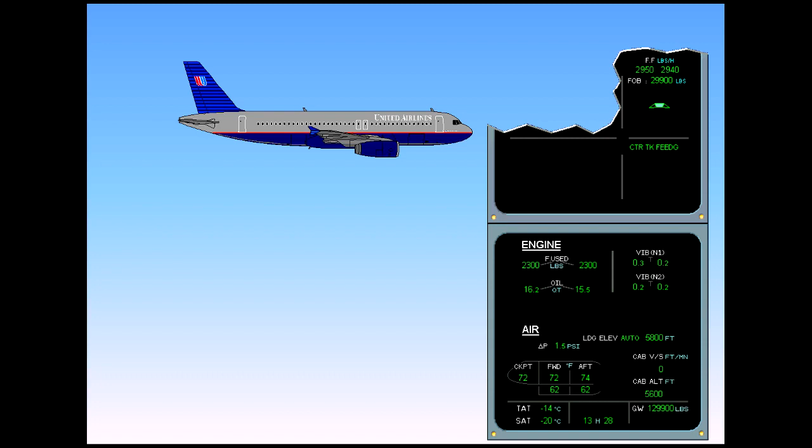This is a demonstration of a failure of the center tank pumps. You are in cruise with the aircraft operating normally. On the engine warning display, read the title of the failure. Notice that the ECAM fuel page is automatically displayed.

Notice the corresponding indications. On the ECAM page, low, boxed amber, means the pump is on but not producing adequate pressure. And on the fuel control panel, the fault light is illuminated amber on the center tank pump 1 push-button switch. Perform ECAM action. Switch on the fuel cross-feed.

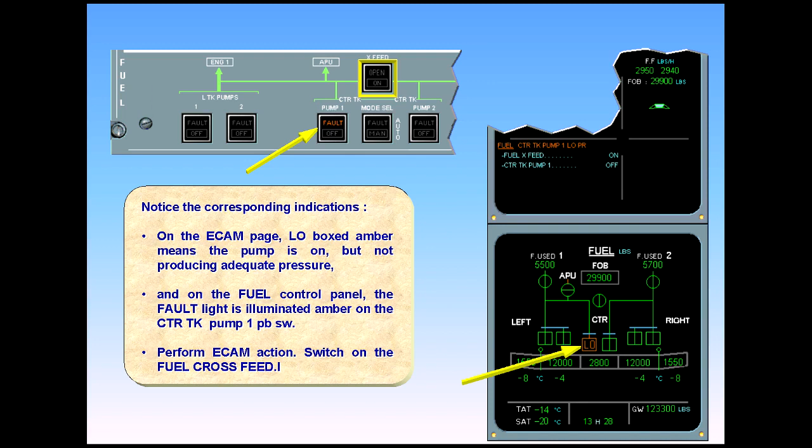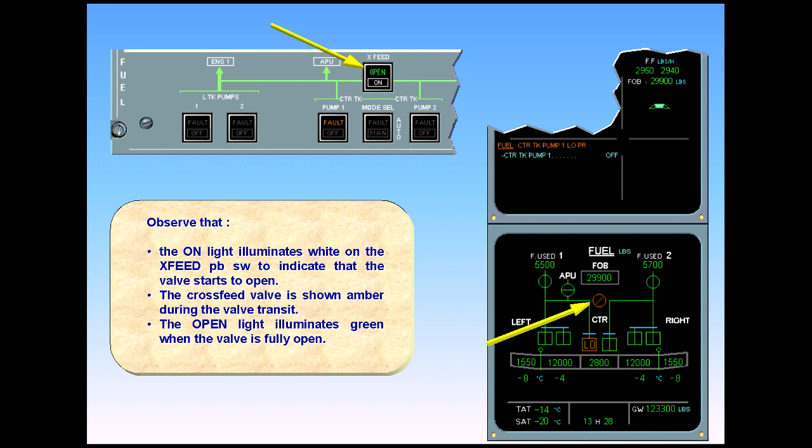Observe that the on light illuminates white on the cross-feed push-button switch to indicate that the valve starts to open. The cross-feed valve is shown amber during the valve transit. The open light illuminates green when the valve is fully open. On the ECAM page, the cross-feed valve is inline green. This allows both engines to be fed from the center tank using center tank pump 2.

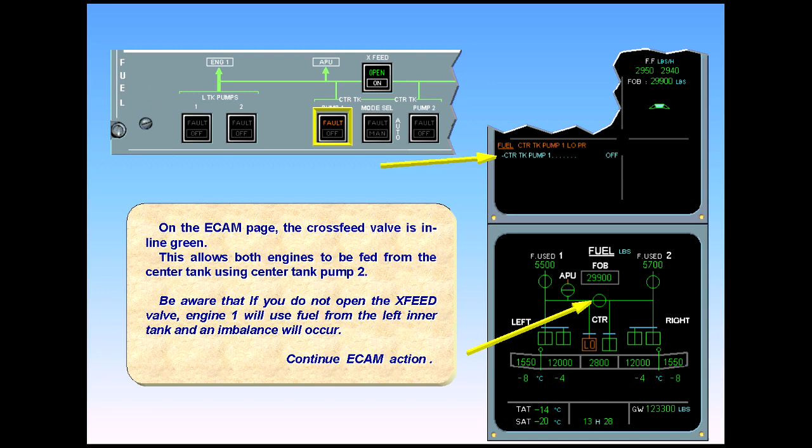Be aware that if you do not open the cross-feed valve, engine 1 will use fuel from the left inner tank and an imbalance will occur. Continue ECAM action. On the center tank pump 1 push-button switch, the amber fault light disappears and is replaced by the white off light, indicating that the pump has been turned off. On the ECAM fuel page, the low indication disappears and is replaced by an amber cross line, meaning that center tank pump 1 has been manually switched off.

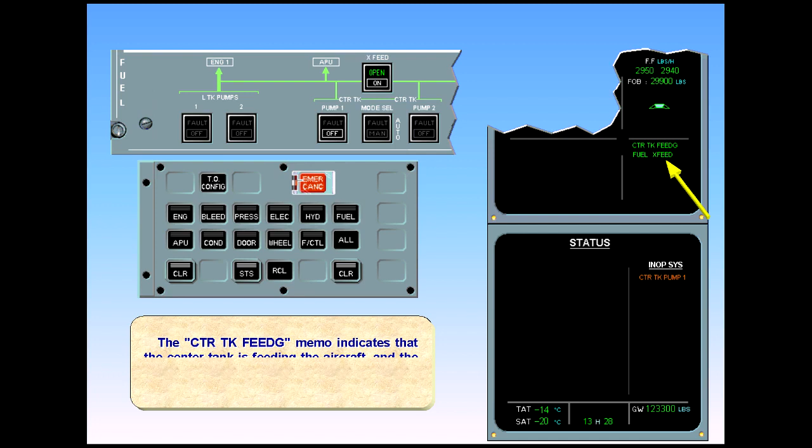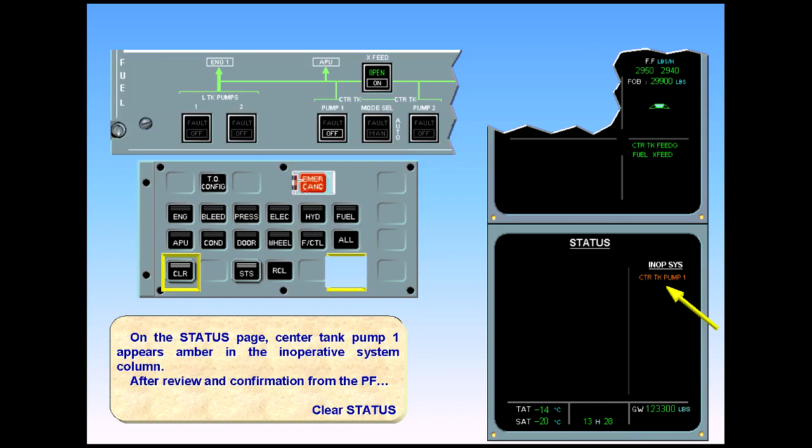The abnormal procedure is complete. The fuel system is analyzed. After review and confirmation from the pilot flying, clear fuel. The center tank feeding memo indicates that the center tank is feeding the aircraft, and the fuel cross-feed memo indicates that the cross-feed valve is open. On the status page, center tank pump 1 appears amber in the inoperative system column. After review and confirmation from the pilot flying, clear status. ECAM complete. Screens normal.

You are continuing in cruise. Remember that center tank pump 1 has failed. Let's see what happens if center tank pump 2 also fails. On the engine warning display, the amber message, center tank pumps low pressure, means that both center tank pumps have failed. You have the same indications as you had for center tank pump 1 failure. Low boxed amber on the ECAM page, and the amber fault light on the fuel control panel. Perform ECAM action.

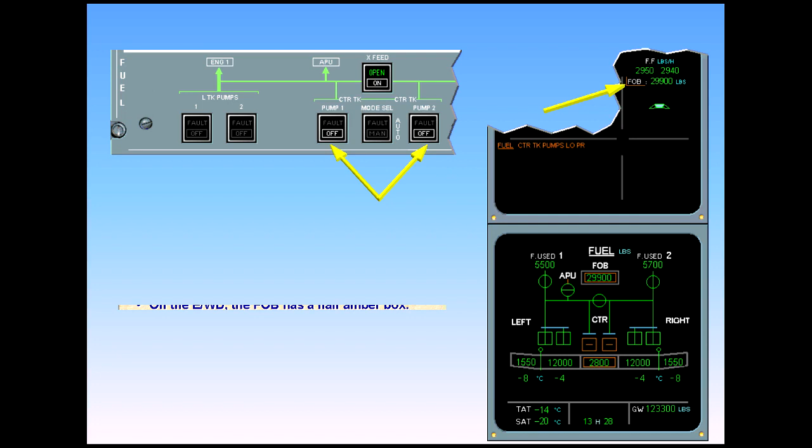Observe the following indications. On the fuel panel, both center tank pumps are off. On the engine warning display, the FOB has a half amber box. The amber box means that some of the indicated total fuel on board is not usable, in this case, center tank fuel. On the ECAM fuel page, the fuel on board value is boxed amber, meaning that not all fuel on board is usable. The center tank pumps are crossline amber, meaning that they have been manually shut off. The center tank quantity is boxed amber, meaning that the center tank fuel is not usable. After review and confirmation from the pilot flying, clear fuel.

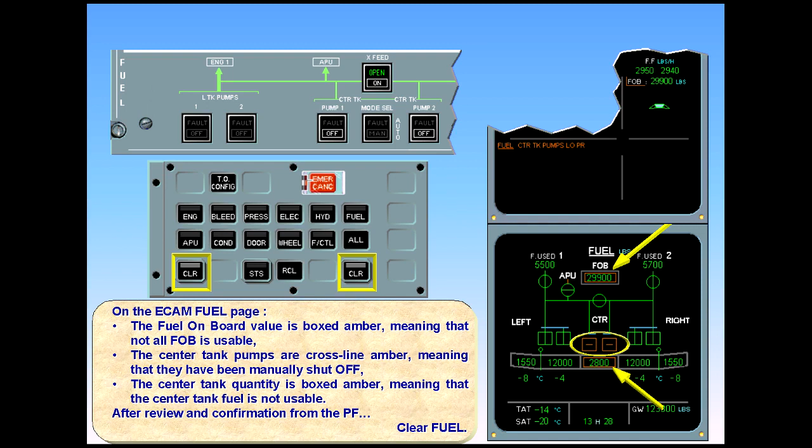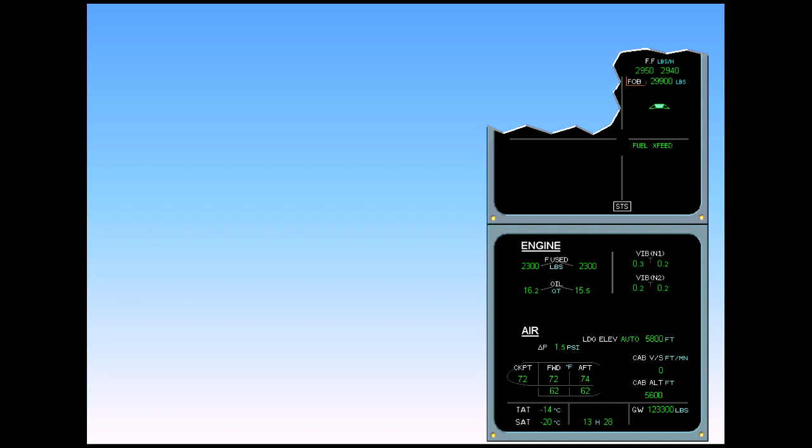The status page indicates the following. A green message indicates that the center tank fuel is unusable. The center tank pumps are inoperative. This is indicated in amber. After review and confirmation from the pilot flying, clear status. ECAM complete, screens normal. The moral: losing one center tank pump requires opening the cross-feed valve to prevent a fuel imbalance. Losing both center tank pumps means center tank fuel is unusable.

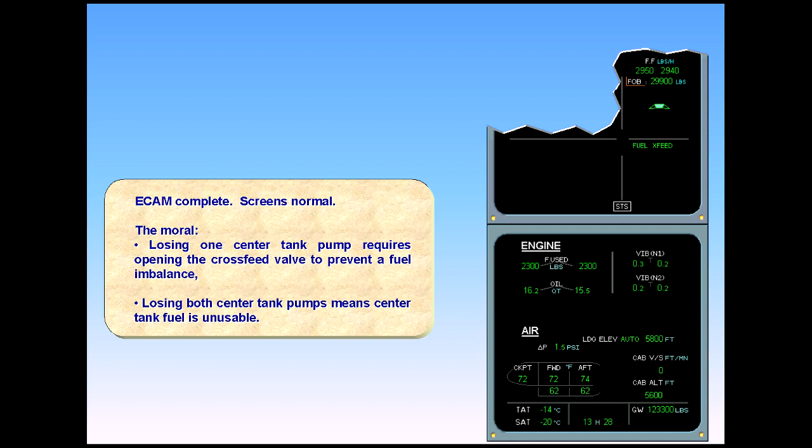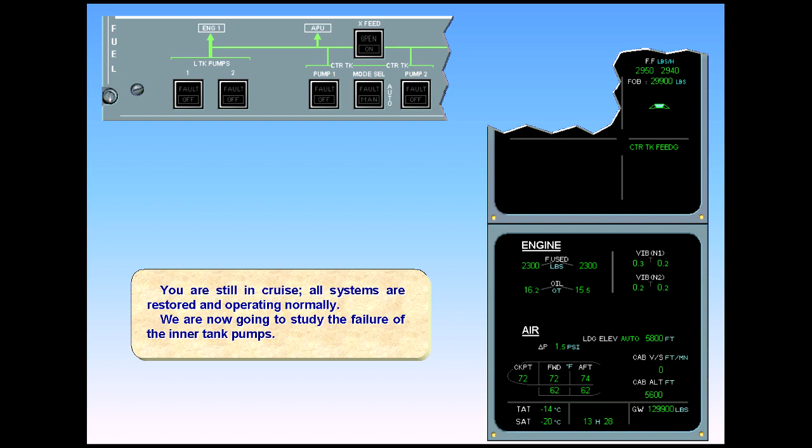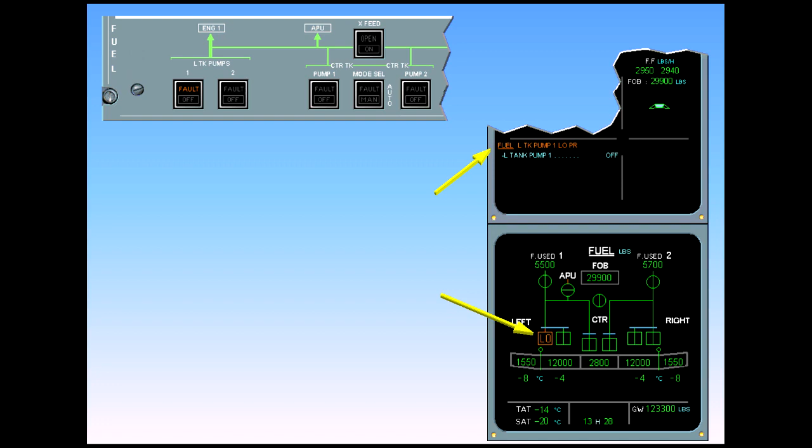You are still in cruise. All systems are restored and operating normally. We are now going to study the failure of the inner tank pumps. The amber message, left tank pump 1 low pressure, on the EWD means that the left tank pump 1 has failed. The ECAM fuel page appears automatically with the corresponding pump indication. Note, the master caution and the single chime are not triggered since the fuel tank has another pump for redundancy. Perform ECAM action.

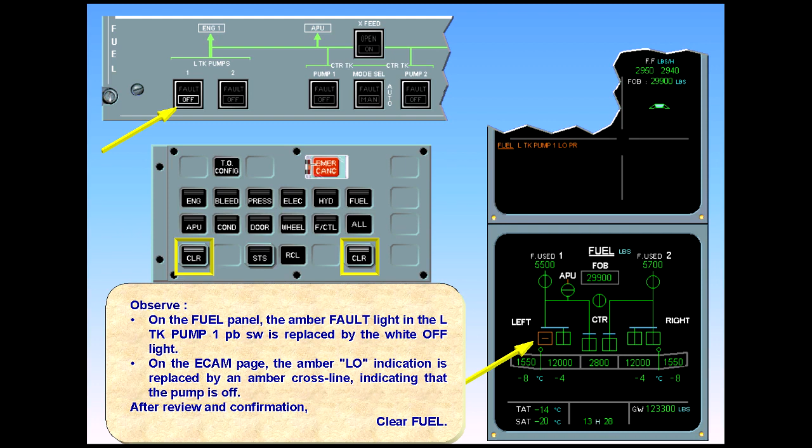Observe, on the fuel panel, the amber fault light in the left tank pump 1 push-button switch is replaced by the white off light. On the ECAM page, the amber low indication is replaced by an amber cross line, indicating that the pump is off. After review and confirmation, clear fuel. The inoperative system is left tank pump 1, indicated in amber. After review and confirmation, clear status. ECAM complete, screens normal.

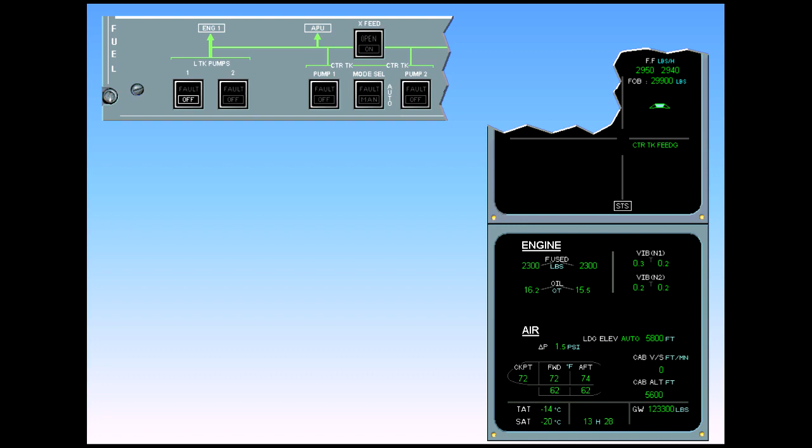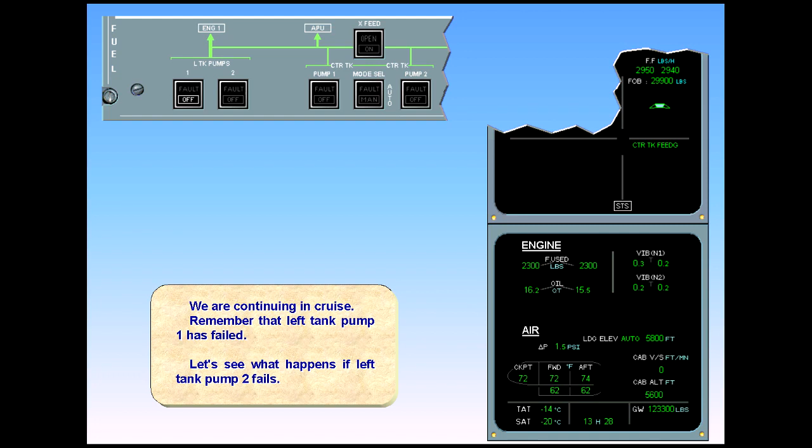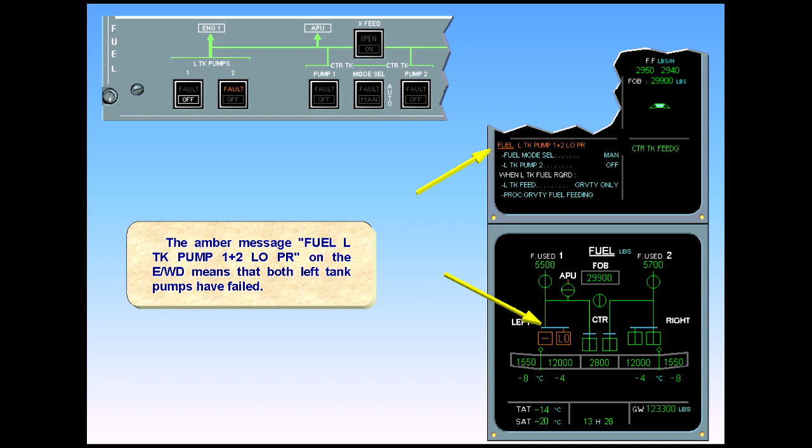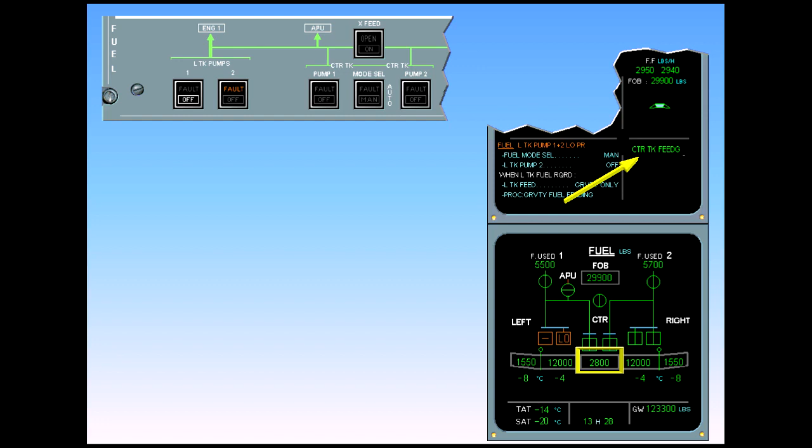We are continuing in cruise. Remember that left tank pump 1 has failed. Let's see what happens if left tank pump 2 fails. The amber message, fuel left tank pump 1 and 2 low pressure, on the EWD means that both left tank pumps have failed. Note, at this time the center tank pumps are still feeding the engines. When fuel from the left tank is required, refer to the flight manual for fuel gravity feeding.

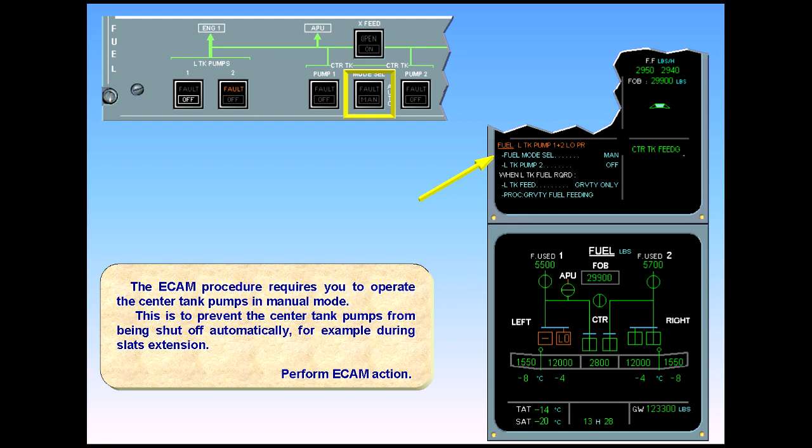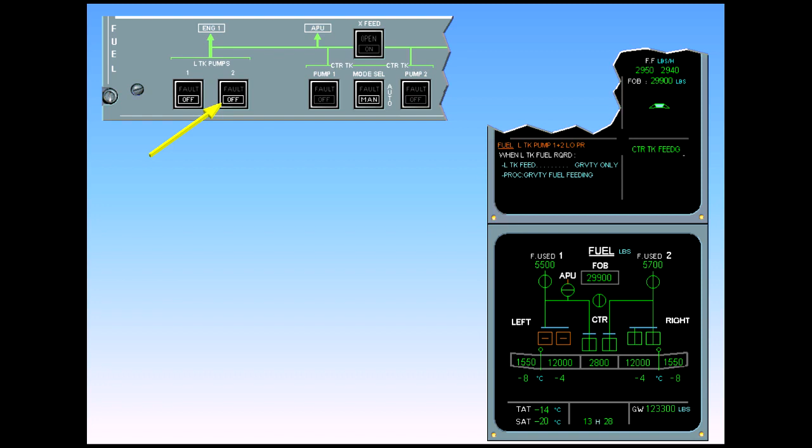The ECAM procedure requires you to operate the center tank pumps in manual mode. This is to prevent the center tank pumps from being shut off automatically, for example during slats extension. Perform ECAM action. Pressing the mode select switch illuminates the white manual light. The center tank pumps are now operated manually. Continue ECAM action. The left tank pump 2 indications are the same as for the left tank pump 1 shown previously. After review and confirmation, clear fuel.

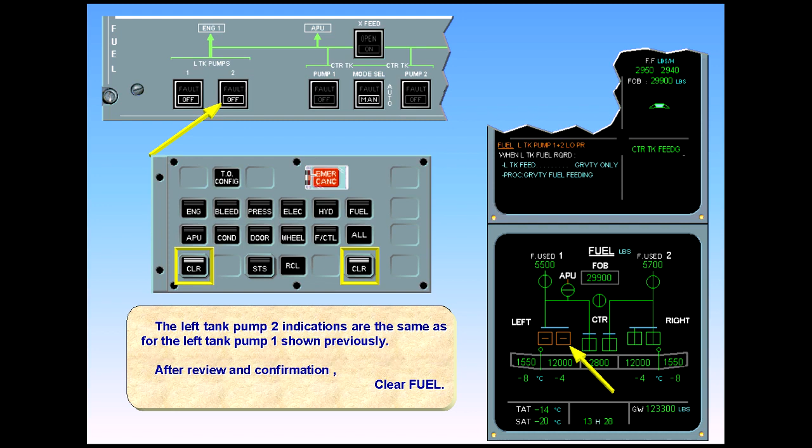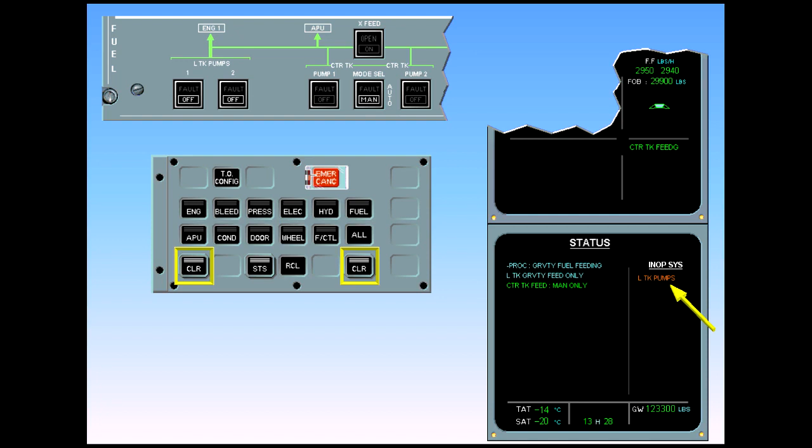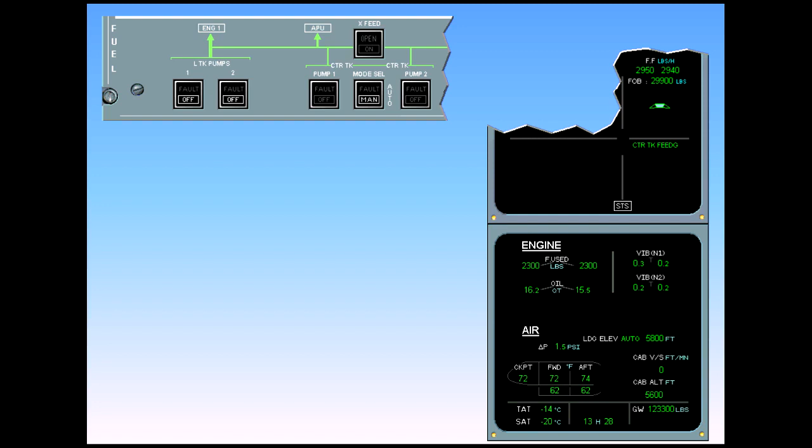Both left tank pumps are inoperative. This is indicated in amber. After review and confirmation, clear status. ECAM complete, screens normal. We learned from the ECAM actions and indications associated with the left tank pump failures that losing one inner tank pump is not so critical, no master caution, because of redundancy, 2 pumps. Losing both inner tank pumps means using gravity fuel feeding if necessary. Refer to the flight manual.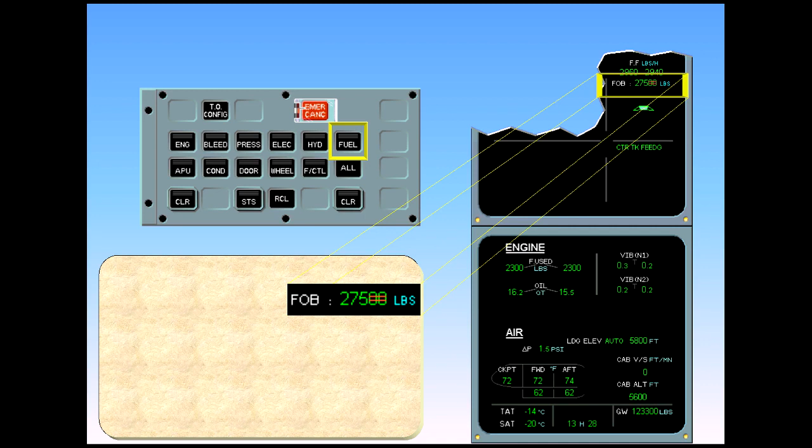Now let's see some other abnormal indications that you can have on the ECAM fuel page. If on the engine warning display, the FOB, fuel on board indication is displayed with 2 dashes across the 2 last digits, the fuel quantity indicator, FQI, is in degraded mode. Select the ECAM fuel page on the ECP to determine which tank is affected. You can see that the affected tank is the left outer tank. The two amber dashes indicate a loss of accuracy of the indicated fuel quantity.

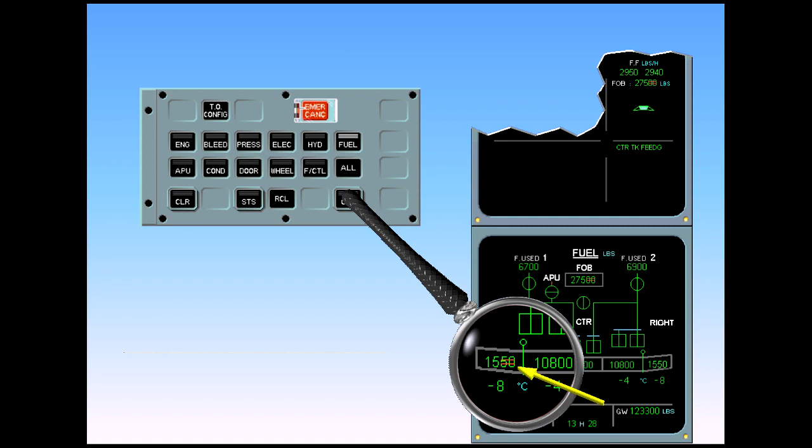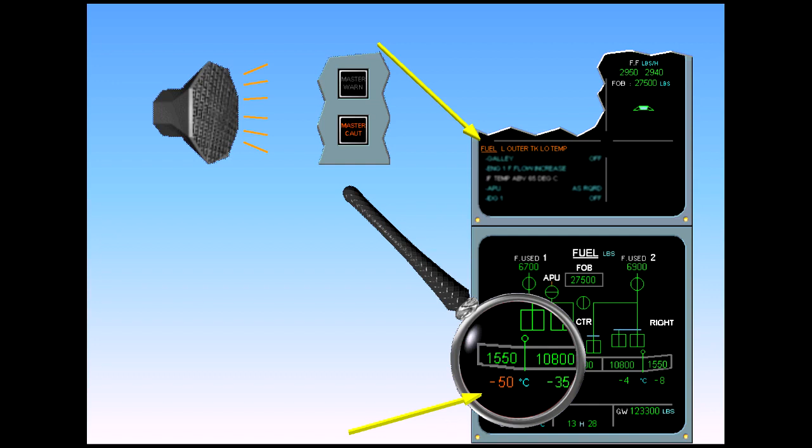Also, notice that the fuel temperature can appear amber, associated with an ECAM message and a single chime if a high or low limit is detected. In our case, the outer tank temperature has exceeded the low limit. On the ECAM fuel page, the left transfer valve is displayed in amber, meaning that it is closed when it should have automatically opened. The fuel in the left outer tank is no longer usable.